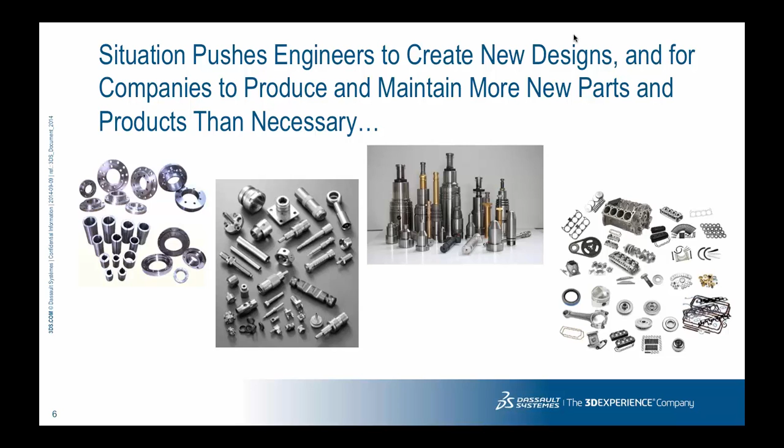So this makes a lot of engineers creating new designs and parts, introducing new parts into the product catalog all the time. So the number of parts will increase and increase, and this of course will be a huge cost for the company.

Now, where do the costs come from? For example, new designs - introducing new designs takes more time to get into production. R&D resources are working on things that, instead, could be spent more efficiently than searching and recreating new parts - it creates inefficiency in the R&D department. Also, introducing new parts always carries risk - new, unknown parts coming into the product portfolio. And it could also be a problem to get a quick time to market; it will take longer when you have more and more parts inside your company.

Moving on a little bit - instead, if we could reuse parts as much as possible, then we could also limit the number of new parts being introduced. Simplified, this is what we are achieving with the EXALEAD OnePart product, which can be summarized in 3 big points.

Reveal hidden assets, meaning using this very powerful search technology, you can find all parts, designs, CAD files, drawings, documents inside your company in a very efficient way. And when you've found something that can be reused, you can reuse it instead of doing a new design. By revealing and reusing, you reduce the number of duplicate parts within your company, leading to huge cost savings.

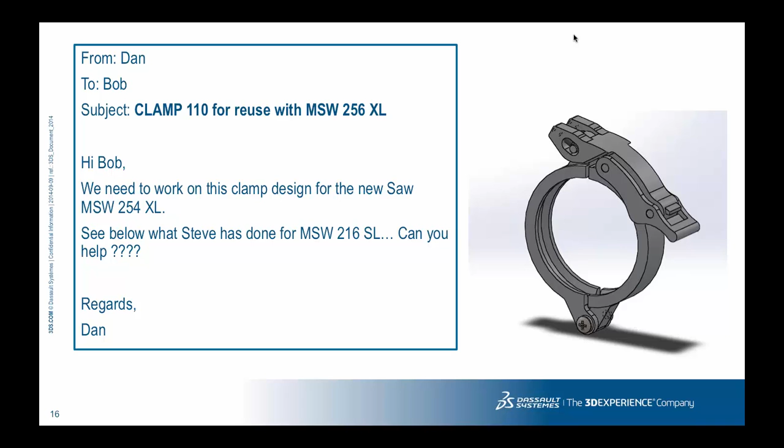They are creating electrical hand tools in different ways, and now they are designing a new tool. Dan asked Bob, could we see if we have something that we can reuse? It's kind of a clamp design, maybe generic. He has this picture and knows it's some kind of clamp. This is a bit difficult for Bob to do quickly and efficiently without a good, powerful search technology. The question he needs to think about is: is there maybe something already inside the company that I can reuse?

That would of course be the best, because Bob understands the problem and cost involved in adding new parts. So he would like to try to find how to do this search based on the rather generic requirement of just some kind of clamp design. Let's open OnePart and find out.

And now I will switch environment to my web browser. Let's see if everything works over WebEx. You can see here I have the system up and running on a demo environment. I mentioned earlier that this is a web-based system, so you can just access it using the link. Maybe you have deployed it on your intranet - that's probably the normal case. You don't need to install any kind of third-party software clients or plugins, nothing is required in the browser.

The system is also based on usability - it should be easy to use. You can see the search bar in the middle. Let's say that I'm looking for a clamp. The system will provide me with suggested searches based on the data that we have indexed. By indexing, that means connecting to all the sources where you have data. In this case, it is the fictional company EXATOOLS. We have retrieved data, indexed the files, extracted all the attributes, 3D data. We will see all the features in the system coming up here, how it works.

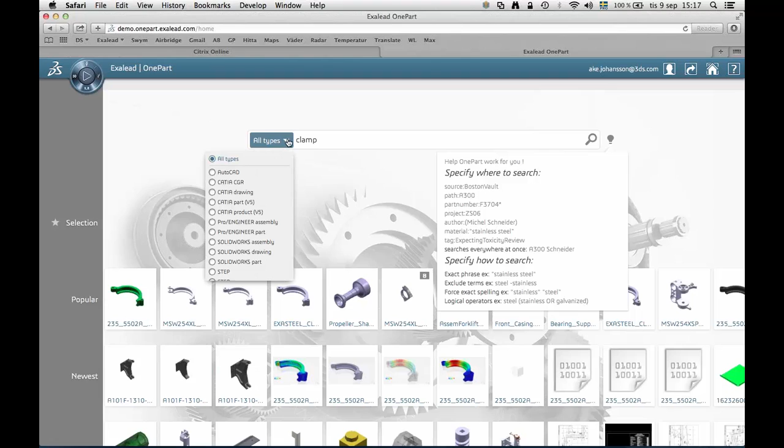And that allows us to do searches in different ways. Clamp is a generic search. You can, if you like, already combine this with specific search items like part number, project, author, material. In this starting point, you can also specify a specific CAD format if you would like to limit your result in this initial search.

But now let's do a search for clamp within all assets inside this company. And you can see we got about 300 hits, like this. The list below is a summary of all items that we have gotten a hit on. Of course, we will find files containing clamp in the file name, but the system is very intelligent and will also go inside files to search for this term.

So that could be inside an Excel file, or inside the text on a 2D drawing. It will extract attributes from the CAD files and use this to be able to provide us with a search result list that matches what we are looking for.

Now, having about 300 hits, it's a bit too much. I'm just scrolling down to show you all the different files and so on, and you can also see that we have previews generated for all the files. This is done without needing to install any client software, CATIA or any CAD software on your machine to be able to see the previews.

This is available out of the box from the system itself. Now, the question is how to do a drill down in an efficient way.

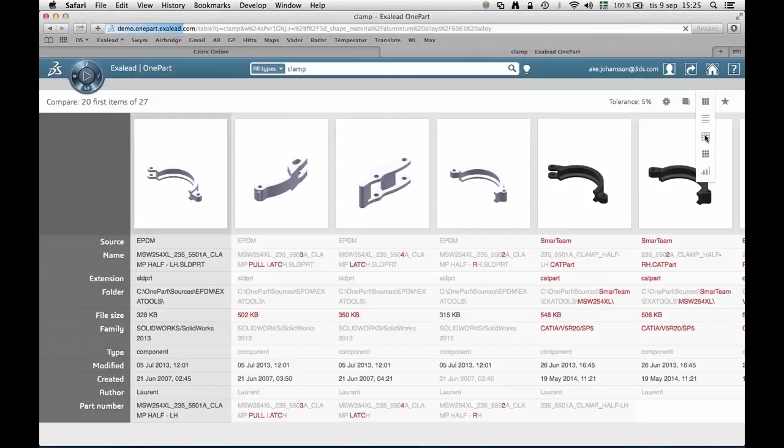You can list this view in different ways. This is more of a line-by-line view. You can also— sorry, I took the wrong one here. Let me go back. Yeah, you can list this as more of an Excel kind of view, which can also be exported to a CSV or Excel file.

You also have the option to view it, which is what I'm looking for, as a thumbnail-related view. So there are different options for listing the information. Let's go back to this list.

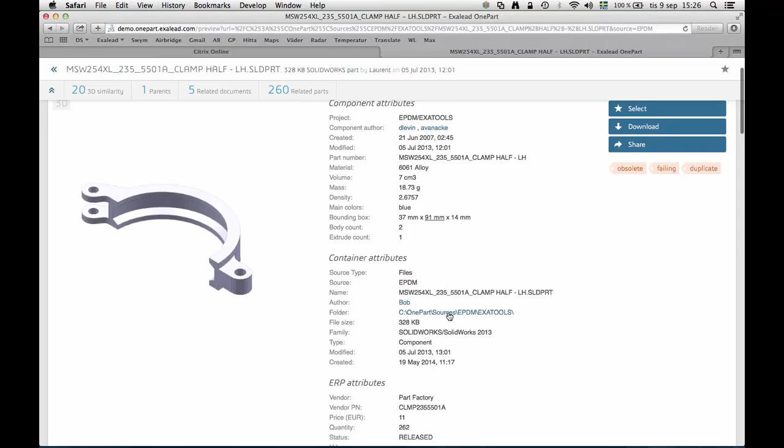Let's click on the first one. Maybe this is something that Bob can reuse. Now you can see the view presents you with component attributes, for example created, author, project, and so on.

Volume and mass density come, of course, from the actual CAD data inside the file. Then there are container attributes—in this case we have the source, the EPDM, the name, size, and so on. Last but not least, we can also integrate any external system that can enrich the data with attributes, maybe from an ERP system like this.

And that allows you to find this inside the same data screen as the file itself. Very useful.

Now, Bob thinks this looks good, but let's look at the right side. You can see I mentioned tags, and tags can be used in different ways. This one has been tagged as obsolete, failing, and duplicate, so maybe this is not the best part to use for a new design. Instead, Bob needs to find something similar design-wise.

We need this kind of design, or 3D shape, and that's what you can find by looking at the 3D similarity. OnePart automatically indexes the 3D shape of all parts and does a real-time analysis, comparing the current part with all other parts and giving you a list of parts with a high similarity score. You can see one had a 100% score, 98, 98, and so on. This gives you a very quick view of any other part with a similar design across multiple CAD formats.

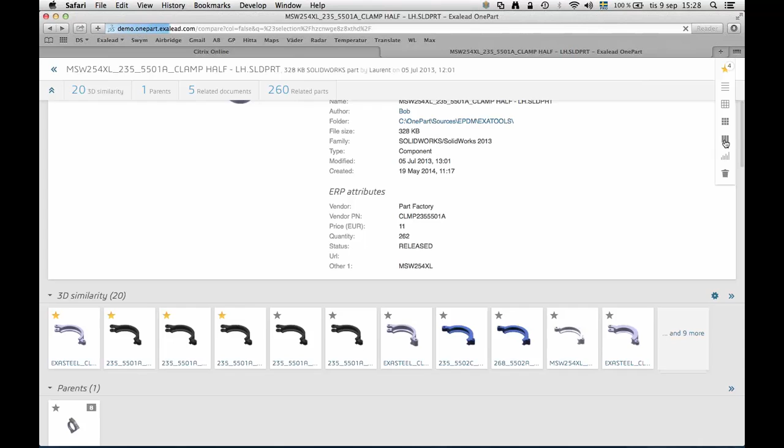Could be good to mention—now, by selecting some of those that could be of interest, let's see how this looks if I go back, and then go up to the compare view. Because the 3D shape is very similar across all the parts, but we might have some differences in the actual attributes of each file.

You can have the master file on the left side and compare it to all other files on the right. For example, the file size is 89 kilobytes on the first one, and that differs here, so it's listed in red. This is a STEP file; this is a CATIA file—you can even see it's CATIA V5, and see sub-levels of versioning and so on.

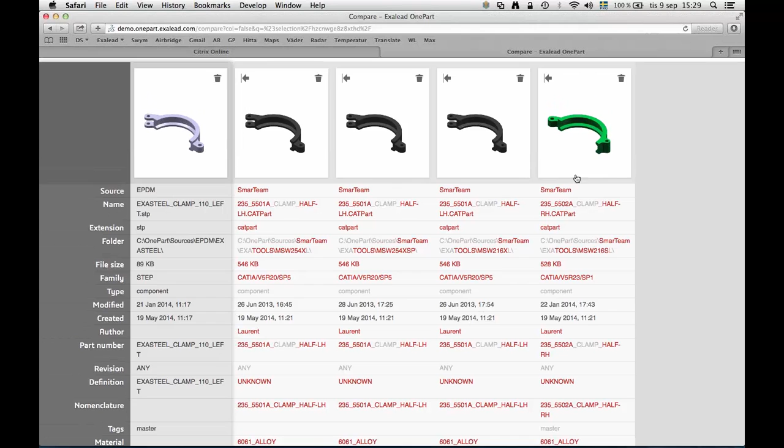Now I'd like to look at something that has been tagged as master, and in fact the green one has the master tag. That looks more promising—let's click on that one. Now I'm in the preview of this part that has been tagged as master. Very good—so this is actually something that Bob would like to reuse in his design.

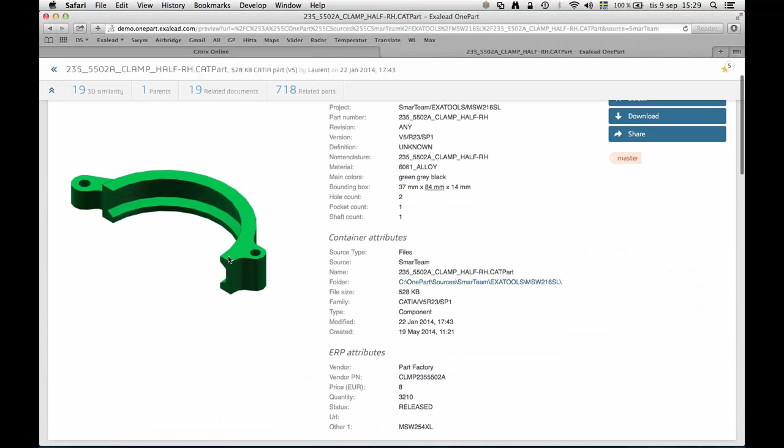Now step two is to see in what assembly this green, approved detail is used. Let's go down—you can see something called parents, which shows the actual assembly where this part is used. So the system understands... no, I lost my browser here.

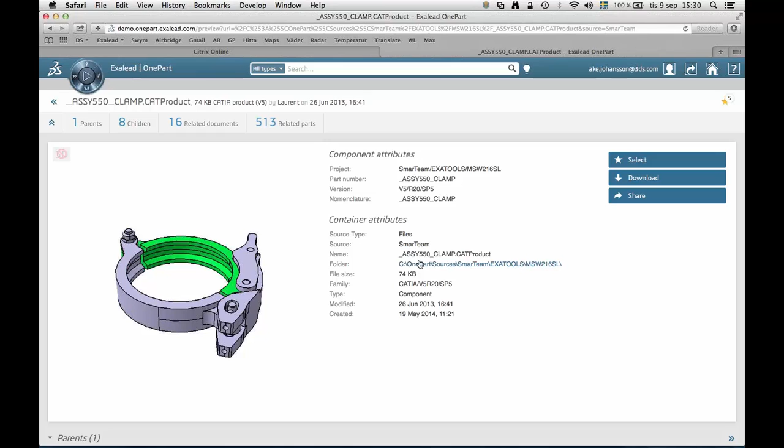Yes, back. The system also understands assemblies containing subparts, and so on. In this case, we can see the design. Here is the green part that was tagged master. This is the details about the assembly, coming from SmarTeam.

By scrolling down, you can see both where this assembly is used in a higher level of the hierarchy, and what parts are included inside this assembly. We have the green part that we found, and also some other bolts and plastic details. That one indicates 3 instances in this assembly, so the system can also provide information about how many of the different parts are included.

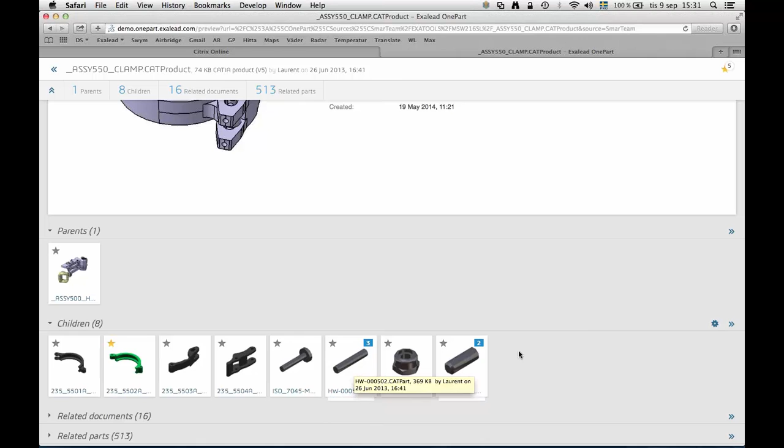Let's click on that one on the right side. Now you remember this view, but we are back and it says 8 items. This is in fact all the parts inside this assembly that we would like to reuse, because this is the complete clamp design that Bob needs to continue his work.

The last step is to click on the share link, because this is a web-based system. You can just take this link and send it by mail, and your colleague can open the link and get the exact same view on his screen. So if I go back to my presentation and my last slide...